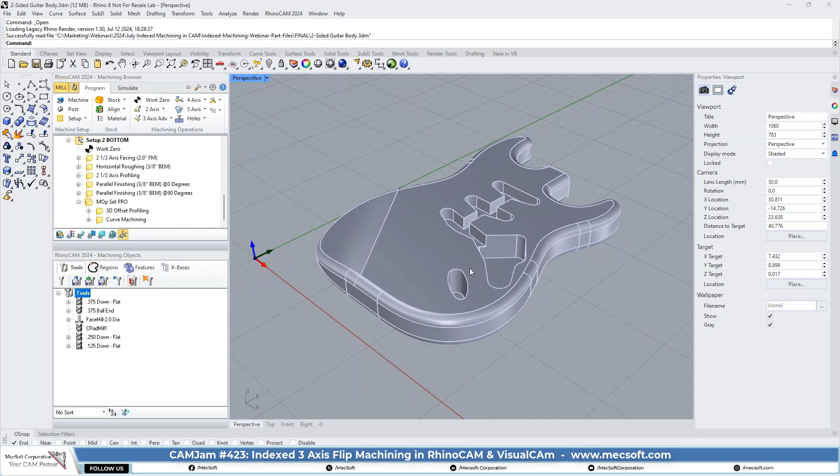For this part, you can machine it. It's 2-sided, so you have to machine both sides, but you can machine it either in the standard configuration, which is a bit more difficult and complex, or in the professional configuration, which allows you to machine both sides in one file. What we're showing you here is the professional configuration. So what we're doing is the top.

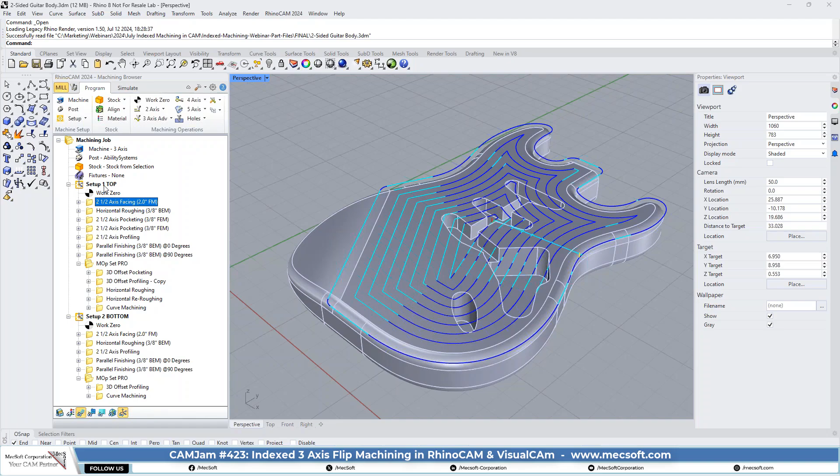Let's turn the toolpath on. So we're doing the top in the standard orientation, which is setup 1 that you see in all configurations when you open a file or start a new file. Setup 1 is considered to be your fixed 3-axis orientation.

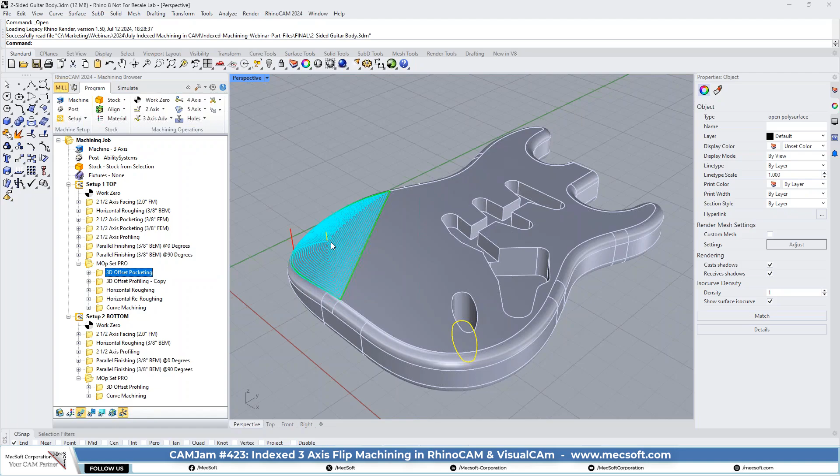And we're doing the facing, some roughing, pocketing, more pocketing, profiling, finishing, etc. And then we have some additional operations that are only available in the professional configuration that we're going to use to have more control over the tool for machining the rest of these areas.

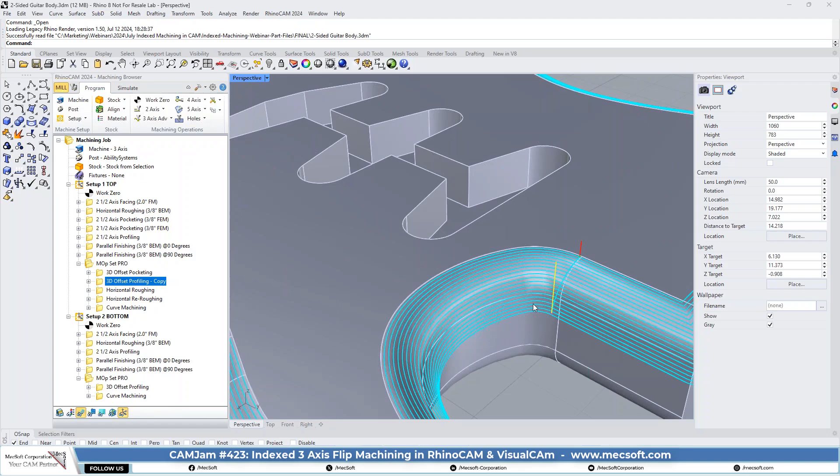We have a contoured area there that we're machining with a 3D offset pocketing operation and 3D offset profiling. Look at that beautiful toolpath. In the profiling, it goes by the edge perimeter and machines down the side. It considers this to be a profile, and it machines down the side in a constant step over. That's a really nice toolpath.

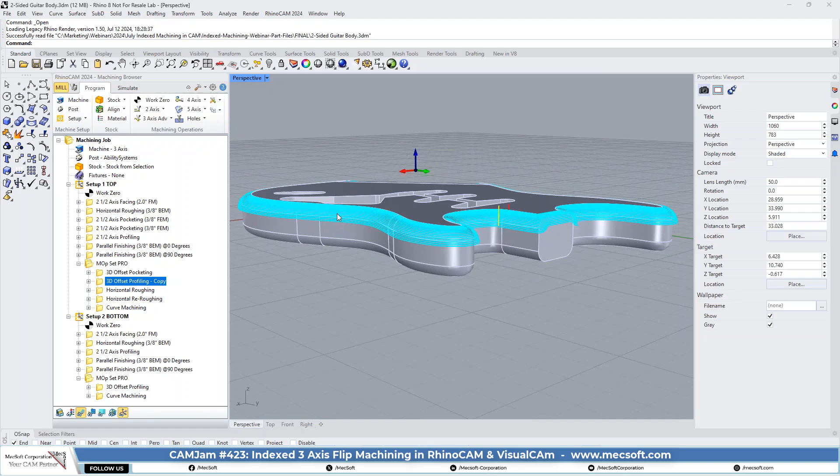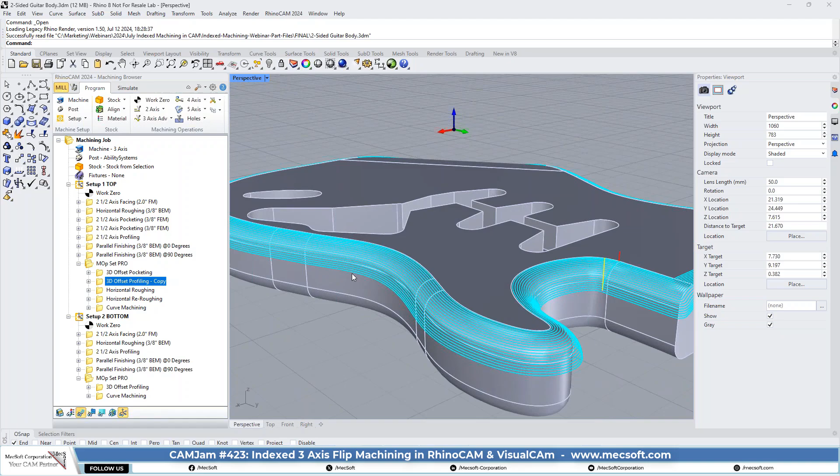Also, I'll mention this because it's one of my favorite enhancements: we actually added contact positioning control for machining. So the toolpath is automatically stopping when the tool touches this perimeter at the bottom. In previous versions, we had to do additional steps to get the tool to stop at that location, but now you don't have to. It stops automatically, calculates where the tool is, and creates this really nice toolpath.

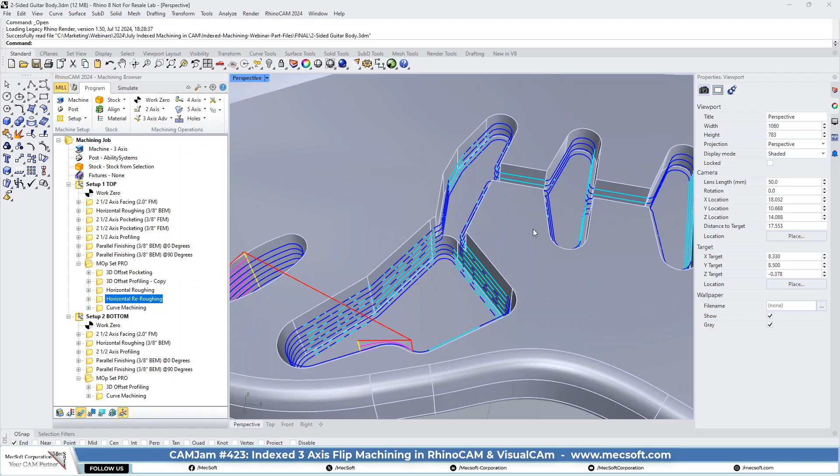Then we have some additional horizontal roughing and re-roughing to get more material out. What's interesting is you may initially start programming this in 2 1/2 axis, with pockets and facing, but the interesting thing about roughing and re-roughing is you can machine all of this in one or two operations. You don't have to break this up into separate pockets. You can use horizontal roughing and re-roughing as a roughing pass and then as a finishing pass to clean up these areas. That's a real time saver.

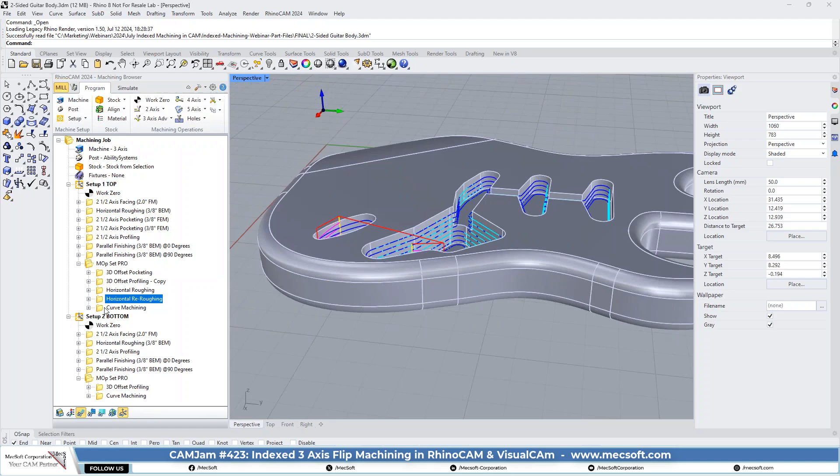And then we also have some nice curve machining to touch up along these edges on this part. Now this is a very good part to illustrate the added operations that you have in the professional configuration. So now that's the top.

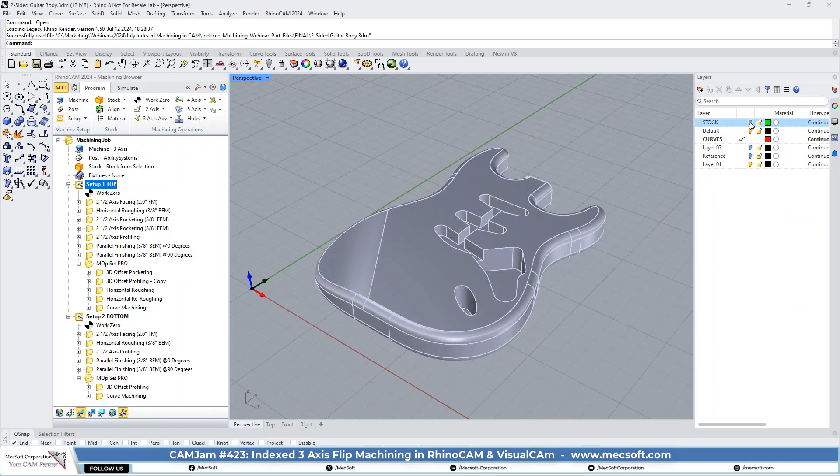If you look at the orientation, let's also look at the stock. Now, we did a whole webinar just a couple of months ago on flip machining, and I suggest you go back and review that, because this is the part we programmed in that webinar. Basically, for flip machining, there are a number of ways to do it, but the easiest and most accurate way is to model your stock with index pins in the corners that allow you to flip it over and realign it automatically.

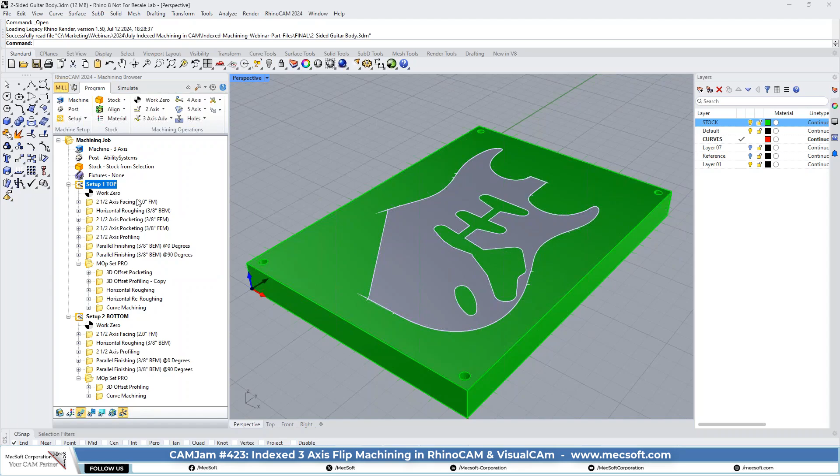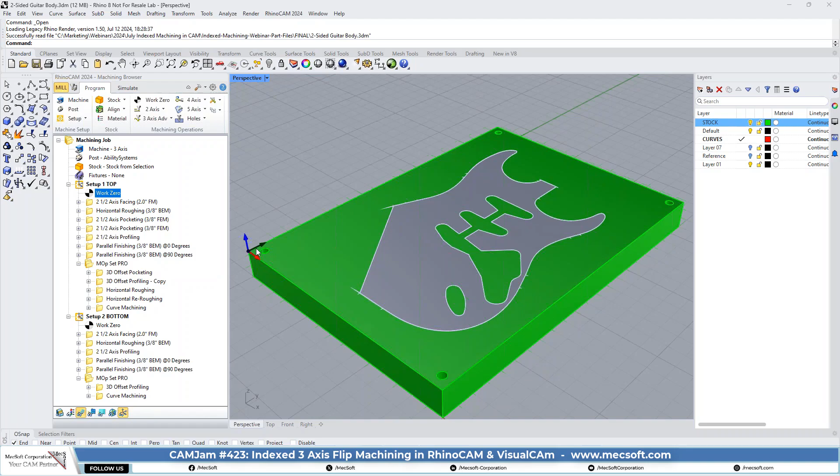So we have setup 1. If you look here, setup 2 is oriented on the bottom. We've got a work zero there, and a work zero there. You'll see it's in the same position. Whenever you lock it in and fixture it into place with pins, just two of them, then you rotate it over, and it's aligned automatically with the same setup in that corner. Perfect alignment. It'll come out perfect every time.

You don't have to think about where's the center line of my part, or flip it over manually. That just runs into all kinds of problems, and it can get complex very quickly trying to figure out if your part moved, or if it's not oriented right, and then trying to debug that. Do it like this and it'll automatically work every time, automatically.

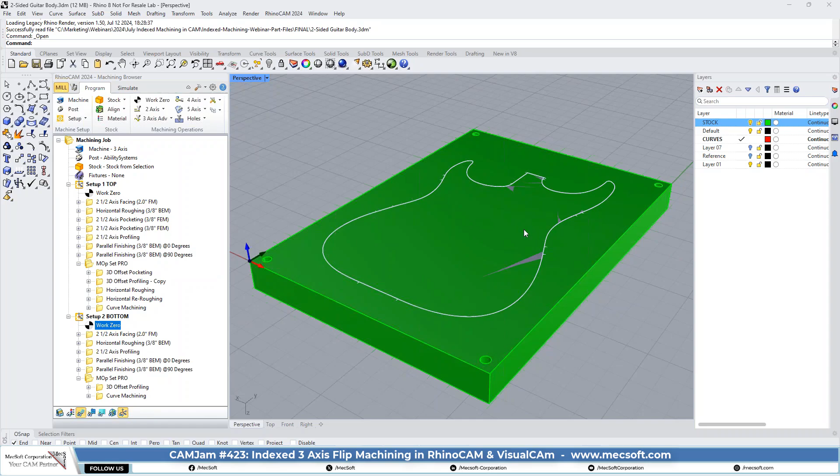So this is what we're calling 3-axis index. We're calling it index with quotes because it's indexed automatically. Index 1 is automatic when you first put it on your table. Index 2 is when you pick it up, rotate it over, and machine the bottom.